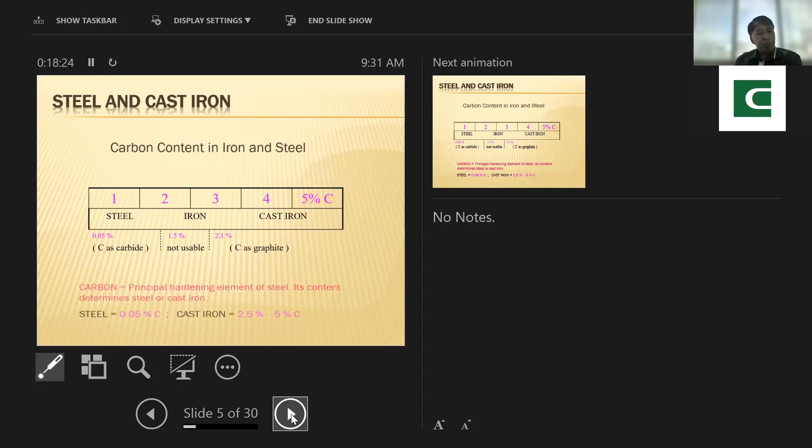Okay, so carbon is the principal hardening element of steel, and it determines if this is a steel or a cast iron. Okay, so cast iron is between 2.1 up to 5%. You are now creating a cast iron.

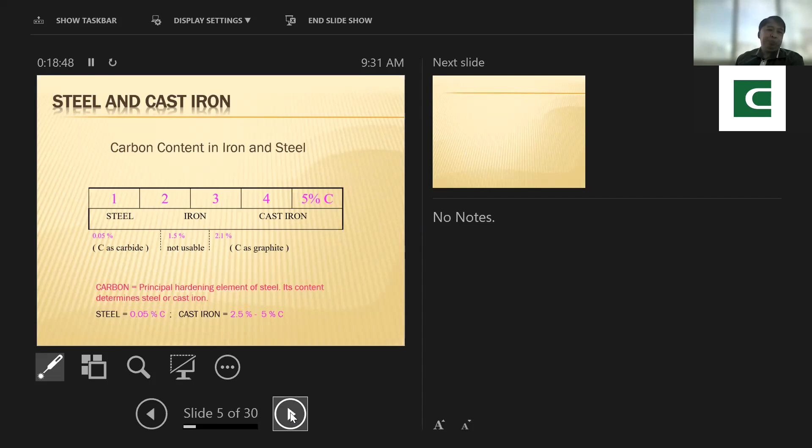Okay, so sabi natin kanina, we have a steel and this one is a cast iron, no? So the cast iron are the gray cast iron, malleable cast iron, white cast iron, and nodular cast iron. Ito mahirap i-welding kasi masyado ng matigas. But kaya pa rin i-welding yan using a special welding electrode and by applying heat treatment. So tayo papasok ngayon sa topic natin na heat treatment.

So if our material is steel and we have the plain carbon steel, kanina, yung walang halong alloy, the plain carbon steel are classified into low carbon steel, medium carbon steel, and high carbon steel. If you notice, nandiyan yung 0.15% carbon steel, these are considered as low carbon steel, while the mild steel or the medium carbon steel is up to 0.5%, and the high carbon steel is 1.5. If you compare weldability o yung process of welding, medyo mahirap mag-welding sa medium carbon steel at saka high carbon steel. But you need to prepare a welding procedure specification in order for you to achieve weldability.

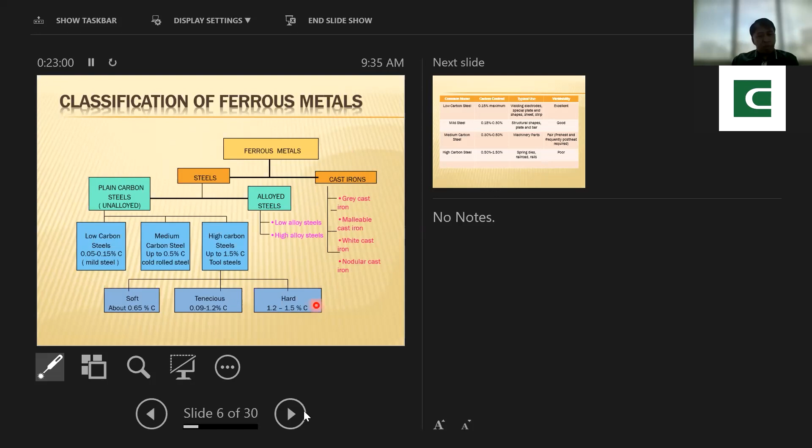Robert, pakitignan yung chat box, baka nagtatanong sila para interrupt mo ko. Kung meron silang tanong. Sige po. Kasi hindi ko nakikita.

So these are the different common steel used in different projects. Low carbon steel, 0.15%. These are the typical use and very easy to weld. While mild steel and medium carbon steel, medyo madali pa siyang i-weld, but you need to preheat the material. However, the high carbon content, you need special welding procedure in order for you to achieve weldability. Okay? So, kailangan walang failure. So, may certain ductility, may certain toughness, and strength of your material.

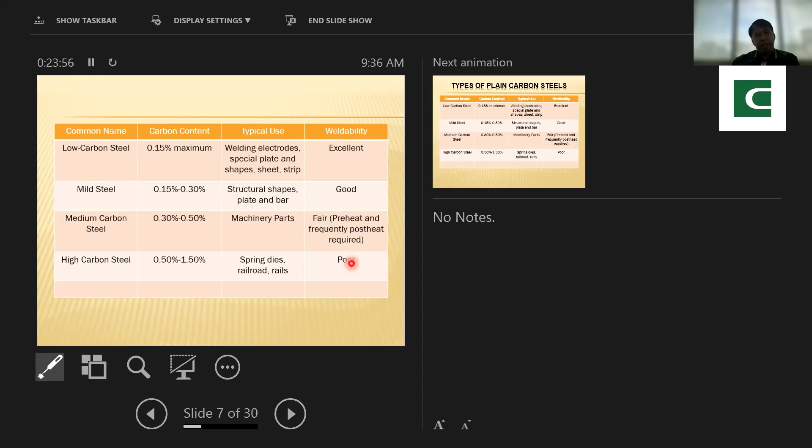Any other question? So, as I mentioned to you kanina, we're using different chemical elements, and we need to trace back what are the different chemical elements during our chemistry days, no? So if you combine two chemical elements, it will form into certain material. So iron plus carbon will create steel. And if you add certain alloying elements such as chromium will create stainless steel, manganese. Ano ba ang tutulong ng manganese sa steel? Maganda yung grain refiner. And if there is a certain manganese content in our material, ito yung na-discover ng mga metallurgists, no? If you add manganese, you will produce toughness and ductility on your material.

So, sabi natin kanina, hindi lang strength is the consideration, but also the toughness and ductility of material. And molybdenum, it will increase hardness, and it will also contribute toughness of your material. And these are good for high temperature in order to have creep resistance. Kaya in power plant, there are combination of chromium and molybdenum material, no? Because molybdenum is good for high temperature, pati rin yung chromium content. Okay, so nickel is also increasing the ductility and maintaining the strength of your material.

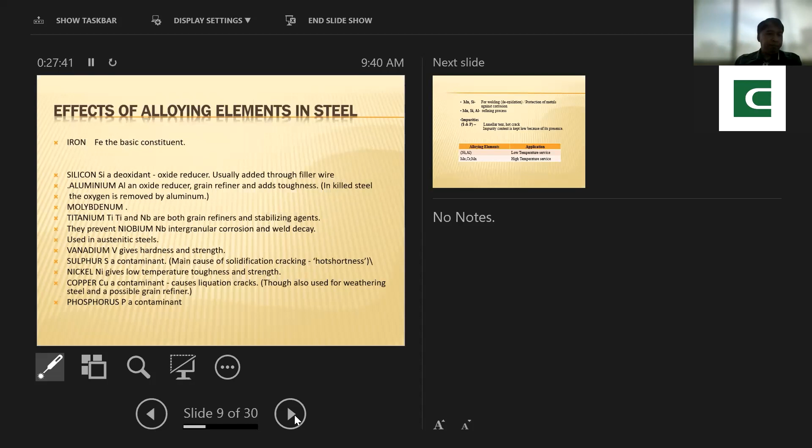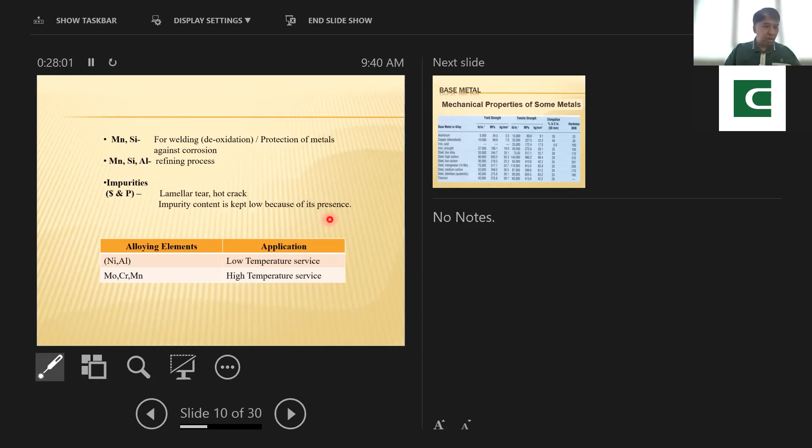So, sulfur is also needed. Sulfur and phosphorus, these are impurities. However, if you exceed sulfur and phosphorus content, it will create lamellar tearing and hot cracking. So you need to control these impurities. Okay.

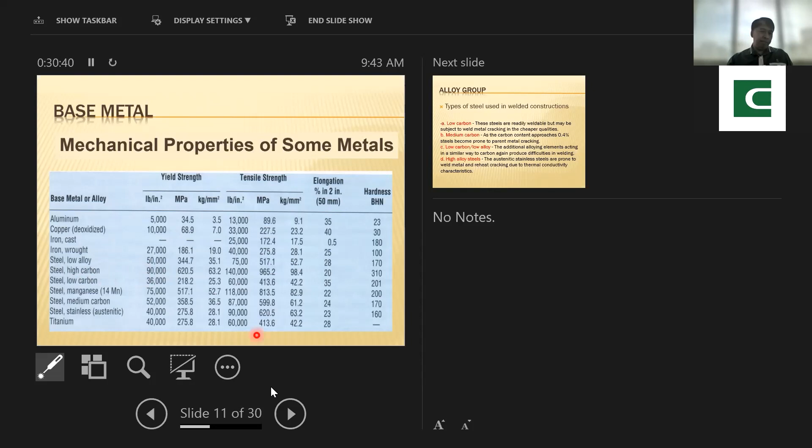So nalaman na natin kanina sa mill test certificate kung anong klaseng bakal siya. And then sa mill test certificate din nakalagay yung yield strength, tensile strength, elongation or ductility of your material and your hardness.

Okay, these are different classifications of steel. Na-mention ko na, low carbon steel, medium carbon steel, low alloy steel, and the high alloy steel. So the austenitic stainless steel is an example of a high alloy steel kasi meron siyang 12% chrome alloying elements, and this is very prone to reheat cracking.

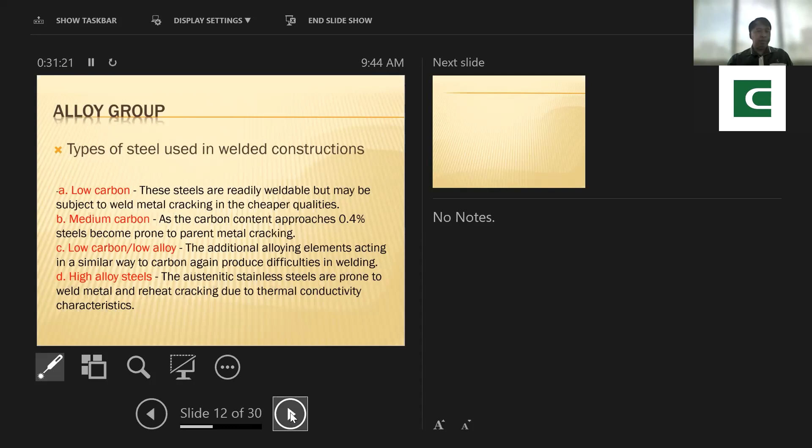Okay, so what is carbon equivalent for weldability of steel? Meron ka nakikitang CE, this means carbon equivalent. And if you have a mill test certificate, may formula in accordance to International Institute of Welding: carbon plus manganese divided by 6, plus the combination of chromium, molybdenum, and vanadium, total mo yan divided by 5, plus nickel and copper divided by 15.

And this one is another carbon equivalent for low carbon steel. So ganun din, kukunin mo rin yung carbon content, silicon, manganese, chrome, nickel, molybdenum, and vanadium divided by yung mga factor niyan, 16, 20. At kapag nakuha mo na yung sum niyan, malalaman mo kung kailangan i-preheat ang material. So if your answer is less than 0.14%, walang problema sa welding, madaling i-welding.

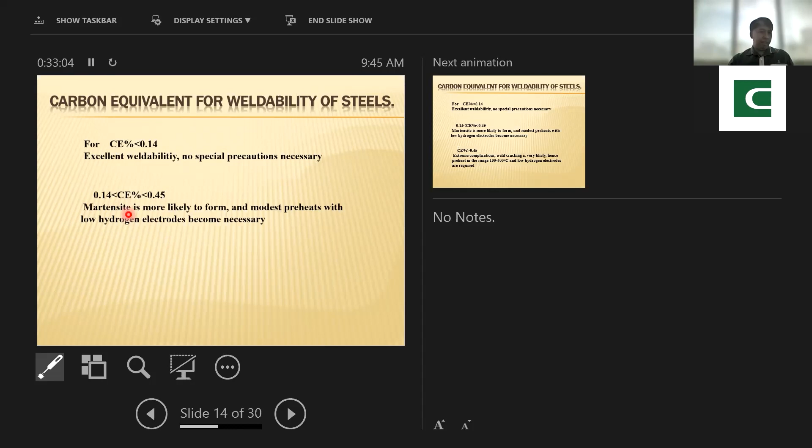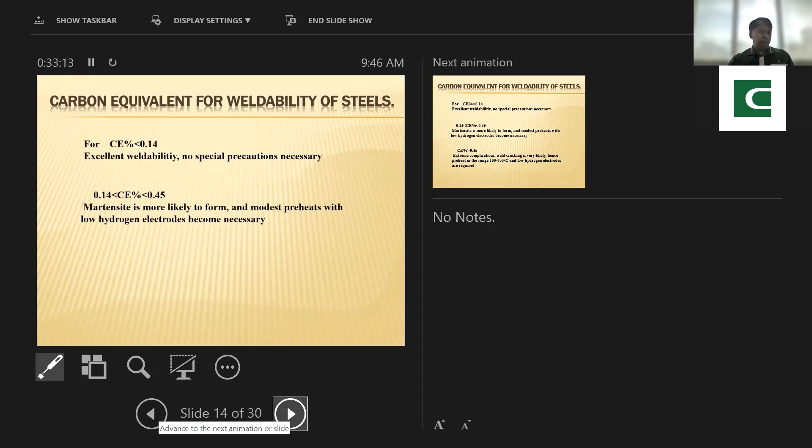If your carbon equivalent is up to 0.45%, you're creating a martensitic material. And martensitic is mataas ang hardness. You need to preheat and use a low hydrogen welding electrode. If it exceeds 0.45, these are very hard and complicated material, and very likely if you conduct welding, cracking will occur. You need to preheat, and you need to conduct post-weld heat treatment or stress relieving process.

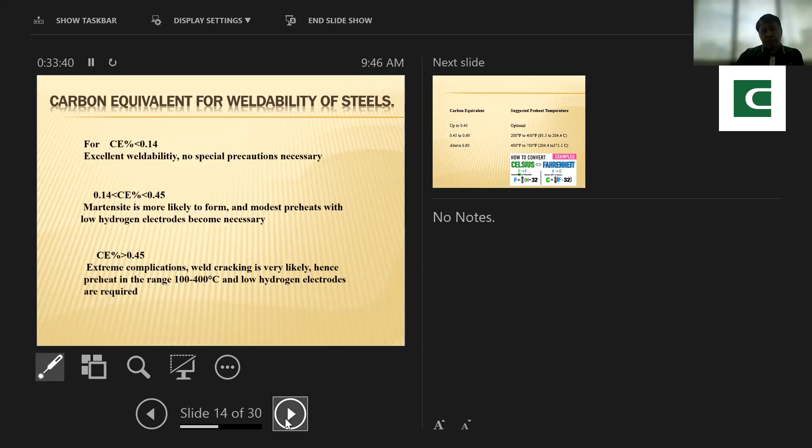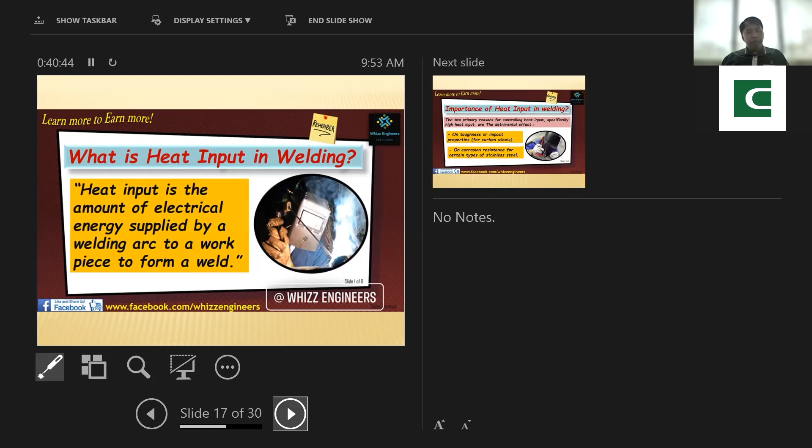And in welding, heat input affects toughness or the properties of our carbon steel. So, aside from the toughness, it will also affect, bumababa ang corrosion resistance if you introduce sobrang taas ng heat input. And this is the reason why some projects, nakakatatlong repair na, pang-apat, ayaw na paggamit ang material.

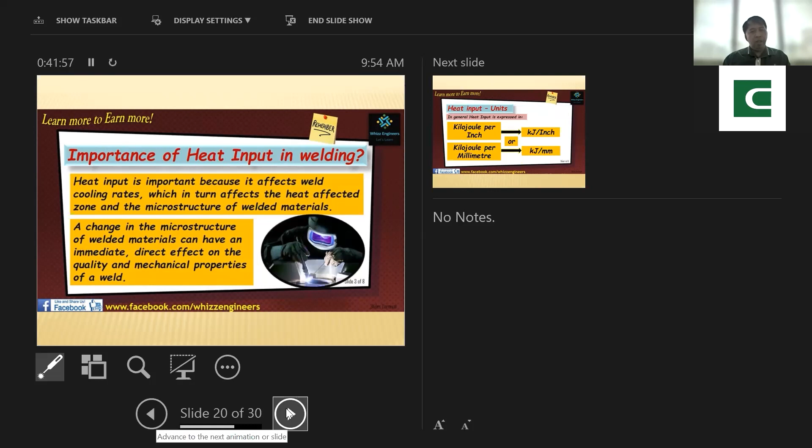Pagdating ng R3, cut out na, because the material will change the toughness, or the mechanical property affected is toughness of your material. Okay, so it will change the microstructure of your weldment material, and it will affect quality and mechanical properties of your weld, such as toughness and corrosion resistance. And the value of this is kilojoules per inch or kilojoules per millimeter. And the formula for heat input is the arc voltage of your welding machine multiplied by the current setting of your welding machine multiplied by 60 divided by travel speed.